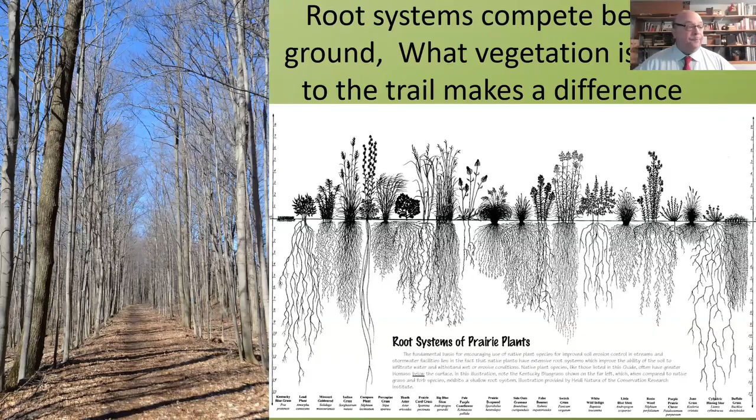Trees, on the other hand, are very large organisms. They intercept wind, and so they build root systems that hold them up in the wind. Let's see if I can't flip down. And so when we look at a tree root system, we usually use this analogy of a good wine glass on a plate. Number one, if we look at enough trees, that means we're drinking enough wine that we can have a little bit of fun. But ultimately, what we have is a relatively shallow horizontal root system.

And that anchors the soil from erosion, but it also is anchoring the tree. So when that canopy intercepts wind, that energy that isn't taken by the tree moving its branches gets distributed down to the soil level. And so we're building a mechanical structure underground to hold the tree up. If your tree is too close to the trail, the pavement is going to lose more often than not, because the tree is going to grow to hold itself up in the wind.

Different tree root structures can be described. Most often, 85 to 90% of the root system is in the top 12 to 18 inches of soil. We get plates that can look heart-shaped, post roots, or shallow plates.

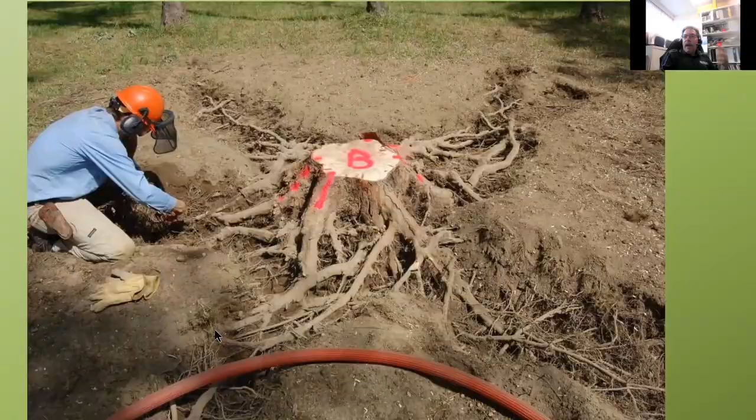If your soils are wetter, compacted, or poorly drained, you're going to get more surface rooting because roots need oxygen and water. They'll be even shallower in a compacted or hydric, wetter soil, so keep in mind that roots grow differently in different soils. That's why the structural soils image showed roots growing deeper—there's more rooting space, air, and the water is draining downward.

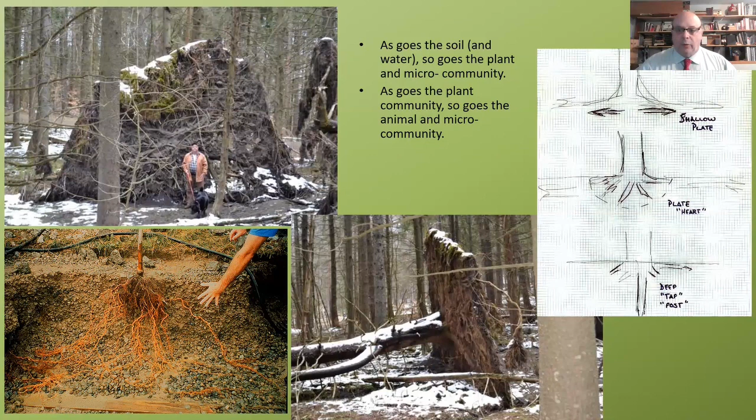Roots will follow water, that's so true. Roots anchor that tree in the soil, but they also fuse with the same species and build root networks through the forest edge. So if you have a trail by the forest edge, it gives us opportunities and efficiencies in where the roots can be and how trees contribute to each other in their management.

When we get close to the trunk of the tree, you have lots of roots going into one trunk, and roots are really good at fusing and grafting to themselves. Here we have 8 or 9 roots that have become one composite root, and you can see the soil trapped inside it.

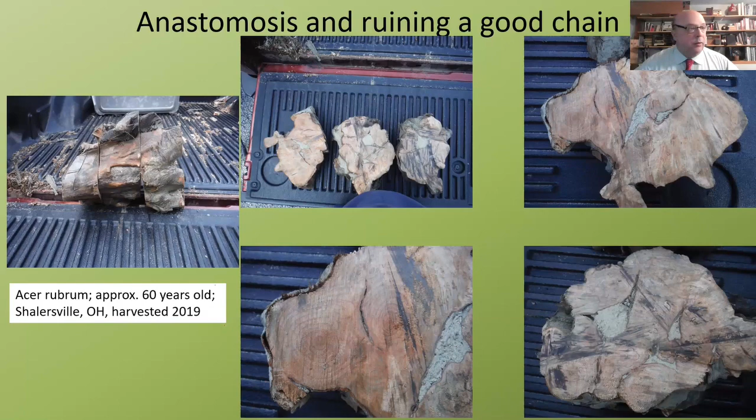When you're close to the trunk, you get more damage to pavement—it's just raw mechanics; this larger root translates load differently. Close to the trunk we're playing a mechanics game with the tree: roots grow more upward than downward near the tree, but by a few feet out they tend to become rope-like. This zone of rapid taper runs from the trunk to a couple of meters away, going from large roots that will blow apart pavement to more rope-like roots we can manage alongside pavement.

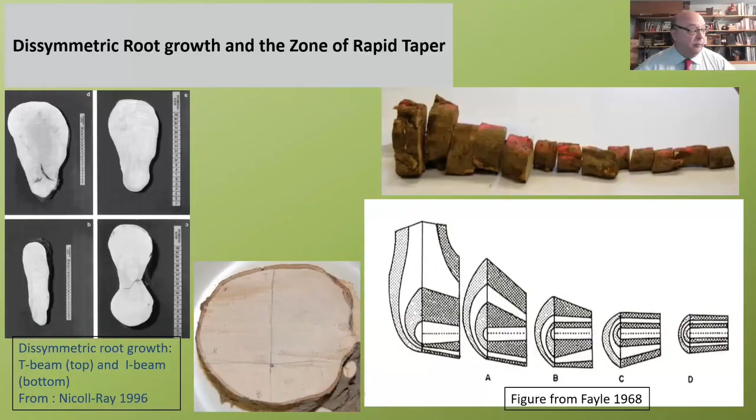So it's really a distance game, and we can bias that trajectory by having the right meadow communities immediately adjacent to the trail. Now, we've been playing this for a while.

When Superstorm Sandy hit, we looked at 126 trees that were blown over by the wind, and this is the data. Almost all of the roots on the edge where we have a wind-thrown tree are about 1 to 1.5 inches in diameter—that's where the energy moving through the root is so high that the roots literally pop, and that's when the tree flips over from wind throw.

We notice maple roots tend to break when they're smaller, while oak roots tend to break when they're a little larger. So there are species and genus differences here, but basically we're looking at about 1 inch roots. Where do we see that break? If we look at this plot, you can see that as trunks get bigger, you have to stay further away from the tree.

What we're measuring is where those roots broke, which matters because this is where the trail gets uplifted when the tree falls over. If we look closely, it tends to follow this line. These stars are data from New Jersey, and this graph is from spruce trees in North Germany. Wide difference in plants, wide geography difference. This is really a structural physics problem, not a biology problem.

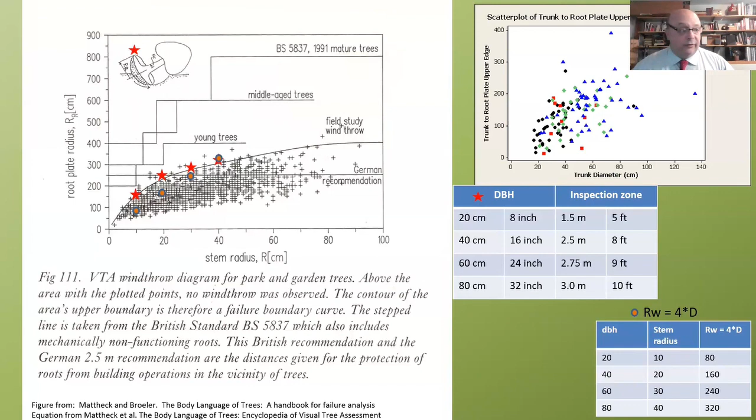Vinny, we good with that? Yeah, I think the only concern is when we talk about root pruning practices—how close do we get to this tree to root prune it. When it's young, it's more adaptable to root pruning. As it gets older, we'd be concerned about destabilizing the tree. Exactly, and that's what we don't want to do.

So I look at this and ask, maybe can we shift the trail? If we're keeping the tree, can we bow the trail around that root? Can we raise the grade of the trail? Are there other things we can do if we're keeping the tree? Because what we don't want is to create destabilized, unsafe trees along your trails, since we'll be talking about cutting roots here shortly.

Yes, we will. And that 10 feet, I want to really hit that hard. The data supports, at least with a Superstorm Sandy scenario, that it's a really stable number. So make that your target—it's the best target we have. If you don't use 10 feet, you've got nothing. So I encourage 10 feet.

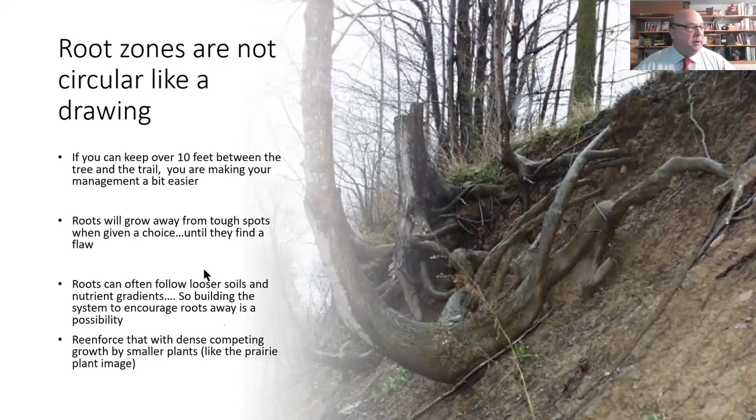The nice thing is we also know root systems don't grow as circles like they're drawn in picture books. Here we have a tree on a hill where all the roots go off to the right, and the functional root system occurs about 6 feet up on the trunk because of how the ground is laid out. So we want to think about the context of where your trail is, as well as the distance—but it tells us we have the ability to train roots away from the trail, and we don't necessarily have to worry about limiting root zones by running the trail. But again, stay 10 feet away so you can build a good plate to hold the tree up against wind. That's an important thing to consider.

If we have a tree close to a trail and we cut the roots, what we know will happen as the night follows the day is, one, you've made an open wound on the tree that you're burying in soil. So all the yeasty beasties in the healthy soil have the ability to attack that root and start root decay, and you don't want that if you can help it. The way we typically talk about this as arborists or tree care professionals: you make clean cuts with clean tools.

Quite often you can make your trench, but then we need to go through after trenching and clean all those cuts. That cut will callus over, and then root primordia will shoot out of that root—much like the Hydra in the Tales of Hercules, where you have one root, now you'll have twelve, and they'll all shoot right where that original root was. So this is not a winning proposal to try to cut your roots as a way out of a damaged scenario. The roots will grow back and completely undo your effort unless you have a provision of space so you can train the roots where you want them to go.

We typically try to avoid cutting any root greater than 1 inch diameter, which happily is about 10 feet away from the tree. Isn't that nice? So again, let's keep it simple—there's your distance. Now a poll question for you.

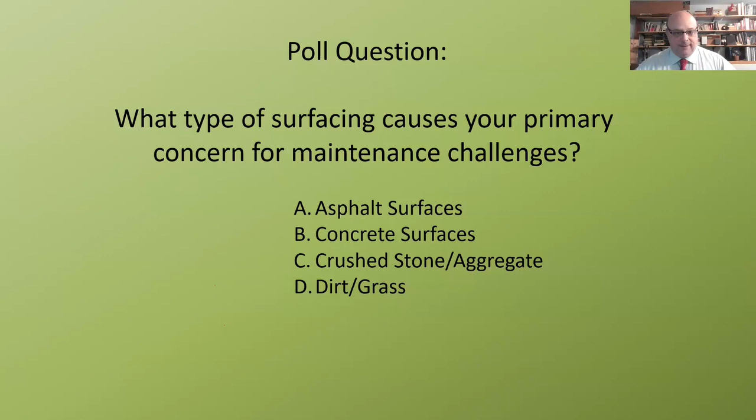All right, answers stop coming in, so we'll stop there. Okay, what do we got? A lot of asphalt. Okay, you bet. Here we go.

We're going right to asphalt. It turns out that a lot of our trails are built like pavements, and I use the word sidewalk here instead of roadway, because a roadway is typically done by DOT with Superpave technology, which is a multi-layer system that's heavily engineered.

When we're doing trails, usually we have that surface, then we have a compacted base over a compacted soil. So this is just kind of a drawing that I use when I'm talking about designing soils for parking lot pavements.

But what we have is the tree. We have roots that are going to interface with that pavement. Here we have the blockage of a curb, but we have our wearing surface. That's what your bikes or your hikers are on. And then that has to be supported by a strong material.

We usually call that a base, if it's a material that we bring in onto the site. If it's just the soil and then we put the asphalt directly on the soil, we just call that a subgrade, and we compact that very heavily.

The reason why is if I put a load on the asphalt, that load has to be transferred through that wearing surface to the soil below. Everything is held by the compacted soil underneath your surface.

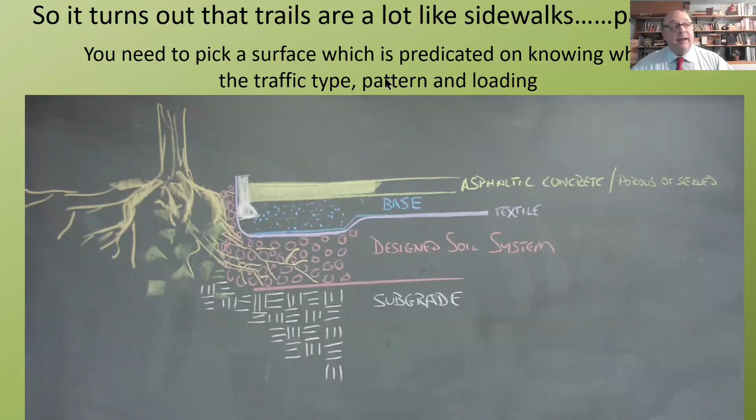So when we're thinking about trails and trees, you need to pick a surface, and you need to know what is the traffic type, the kind of traffic patterning, and the loading, because quite often asphalt can work, but it's very expensive, and maybe you're over-tooling the trail. It really depends on how much traffic and what the loading is going to be on that trail.

To do asphalt surfaces, you do have to compact. And if you do a concrete sidewalk surface, you have to compact. And what we do is we compact it to a magic number. They call it 95 to 98% proctor density. We'll talk about that in a moment.

We put the thin layer of gravel base to level things off, if at all. And then we either pour a concrete with a wire reinforcement, or we can put down that blacktop and roll it out, punch it down. And then we have a surface for our riders and our hikers.

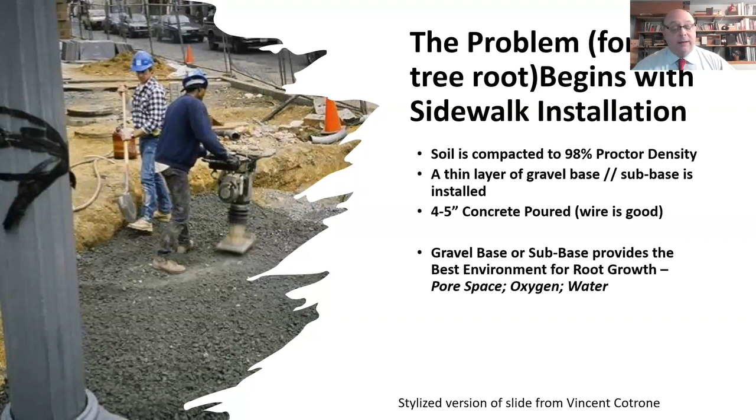Now, the thing is, a lot of times if we use a gravel base, no matter how hard I punch it with a vibratory tamper, there's going to be a lot of airspace. So roots can grow in that. And if roots are close to the pavement, that's what's going to crack your pavement.

But let's start with compaction first. When we have a soil and we compact it, we're putting energy into the soil. What does that do? Well, it does not change how many solids you have in the system. And water being incompressible, it doesn't change the water in your system. The only thing that compaction can do is rearrange the solids so that we eliminate air-filled voids.

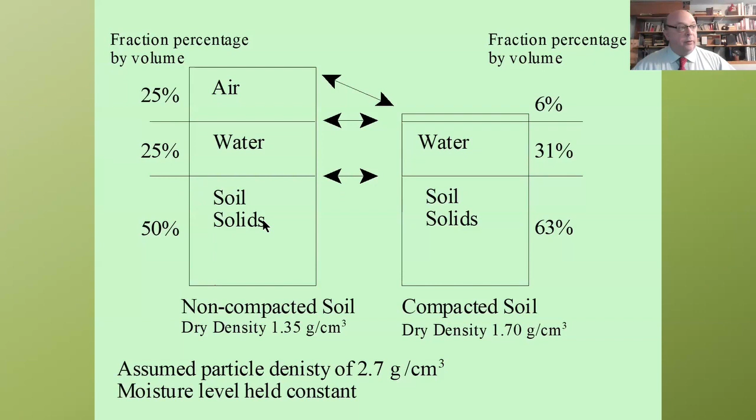That's all we're doing. It's like squeezing a sponge and getting all the air out of it when it's underwater. That's what compaction does. More to the point, if I compact the soil and then it rains, I've eliminated drainage, so I have very little air in the system, which is good because usually that means that the strength, the bearing strength of that soil goes up and becomes very predictable and reliable, so I can design my pavement surface. That's a really good thing if I'm about the pavement.

It's probably not such a good thing if I'm a plant, and that's okay. But the thing is, between that surface of the pavement and that soil, there is a weak zone. It's an interface between two different materials. The root is going to follow that least resistance channel. So you're biasing the roots towards those interfaces between the wearing surface and your base, or between the base and your subsoil.

Hey Jason, I know I said I wasn't going to do this, but there's a question that came in: is there a reason why we can't compact to 80% instead of 95-98%? Yes, there's a couple of important reasons. One is it's very hard to control for 80%.

We usually use 95% because it allows us a 3-point inspection process. We test one section, we test another. If they're close together, we accept the compaction. If they're different, we pick a third one and go with the average of the closest two.

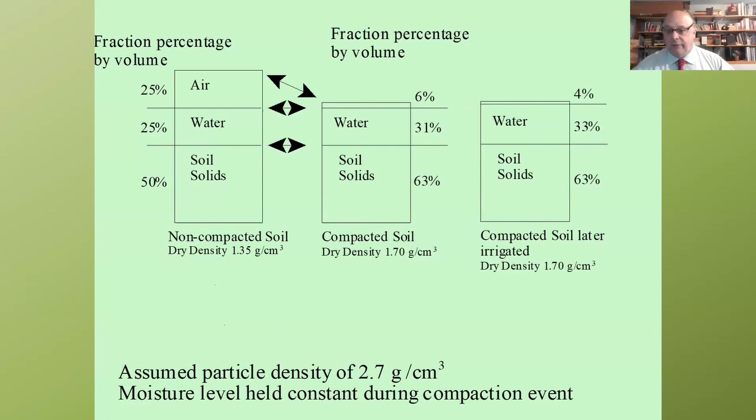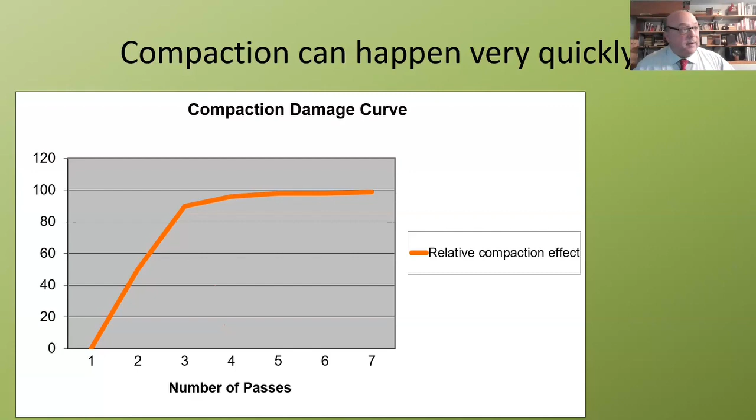So if I play the game right, I can choose different kinds of compaction on the same soil and change moisture content, and I can predict where my peak density will be after passing over the site and putting energy in. Why that matters: if I use heavy equipment, I'm going to have a denser soil. I use light equipment, I'll have less density. I could have overweight chickadees jumping up and down on the soil and create a curve like this.

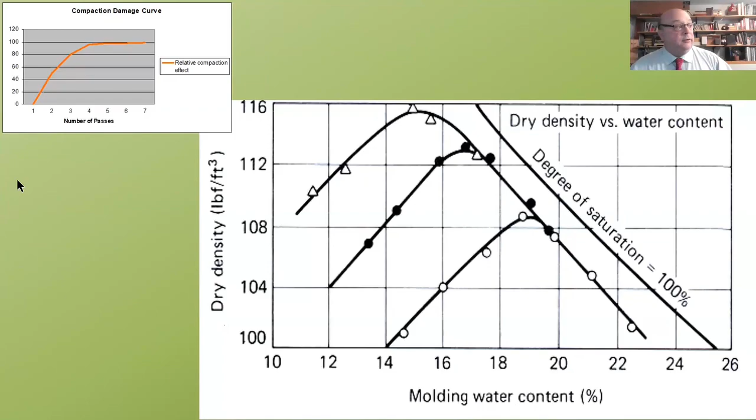It tells us that when we're building the road, we pay attention to moisture, and the number of times I hit that soil really has a diminishing return. So all of our compaction equipment is designed to hit 95% density at the right moisture content within 3 passes. That's why we get to 95%. It's just a convenient way for us to have reliable behavior and have equipment designed to get it to a point where it can support the pavement. So hopefully, Vinny, that answers the question.

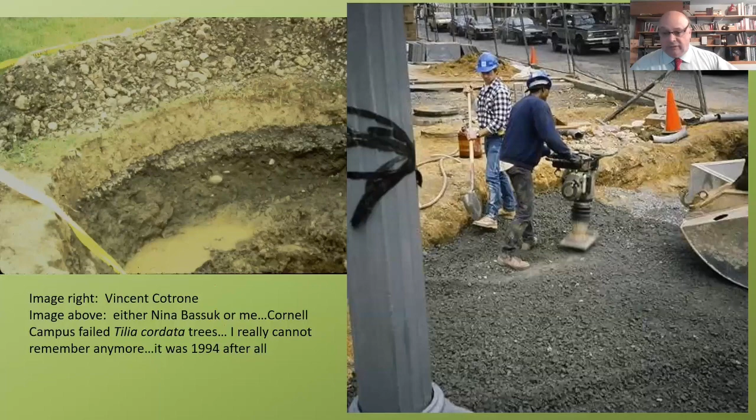When we build something like this, we're going to compact it rather heavily so we can support the surface treatment of your trail. The only way to get out of that is to decompact the soil. We've been doing that for a long time. This is the most violent method, but I think one of the more fun methods of decompacting that soil. This is meant as a joke, folks, but this is how we used to deal with it.

I love it. What we have found, though, is that if I have a really sandy soil or a gravel matrix like a base of crushed stone, if I can control the size of those stones, even if I compact it as much as I can, even past 95% of my target, I can still have root penetration and air voids, but it has to be over 80% sand. We find that if we're less than 80% sand, by the time you properly compact, most roots do not want to penetrate that soil.

So going to some of Tom's comments, if we build things correctly, that helps us. It doesn't avoid the conflict, but it certainly helps us in the management of the conflict. So a lot of it has to do with moisture control when you compact, compaction control, and the design of that trail.

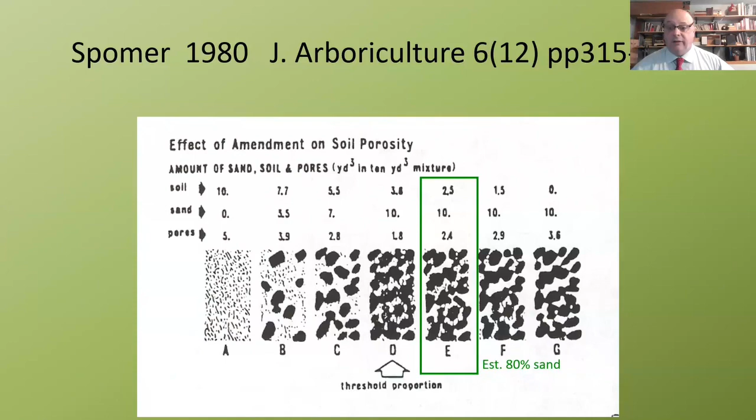Otherwise, even if it looks really nice, we start getting bumps where we have roots underneath displacing upward that pavement. If we displace it upward enough, we get tension across the surface of the pavement, and that develops a crack. Once I have a crack, now I have air getting in there, I have water going in there, I have an interface that's artificially weak. Roots are going to blast through that and expand. So once you get the crack, now you're off to the races and the tree is winning.

And the tree may be on both sides. It grows through the fence, and the railroad will say, it's not mine. The trail may say, well, I don't know, but it's especially the invasives, and maybe you can talk to that.

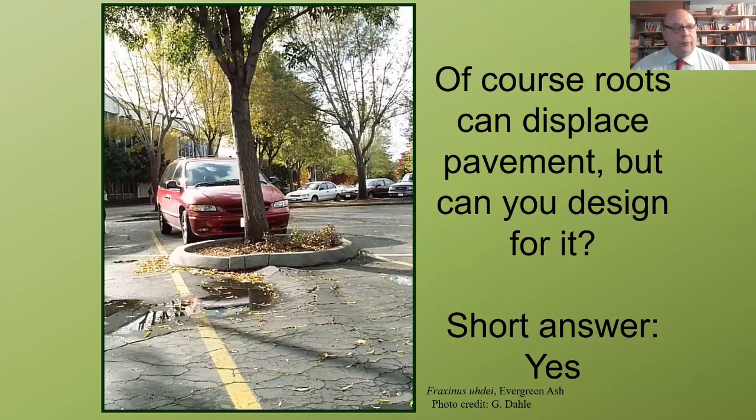So can trees displace pavement? Of course they can. We've seen that. But can we design for it? And the answer is, well, yeah, it's pretty easy.

Well, first thing is stay away from the pavement as much as you can. The closer you get to that trunk, the more likely you have thicker roots with an upward trajectory of growth. And that energy, every time that tree flexes its trunk in the wind, is going to put an upward load on that surface. So this is really a distance argument.

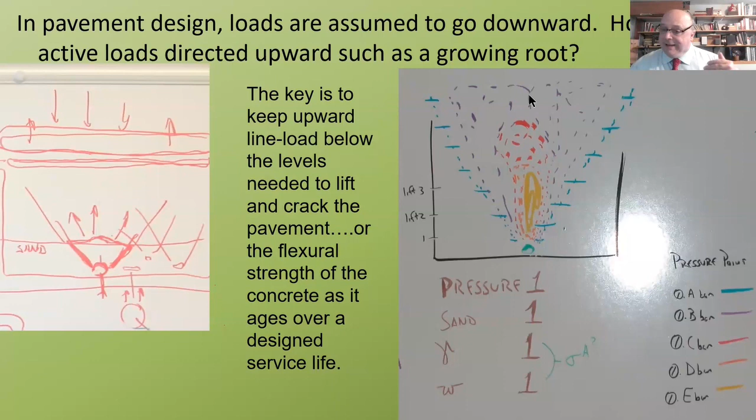And if you can move backward from the side and you encourage a different plant community on the edge, you can minimize some of this. But if you don't have that, we have spent time and years growing roots deeper and deeper away from pavement to see if we can get roots and pavement to coexist. And we've done some of that work. I've actually got several papers where we've worked that out.

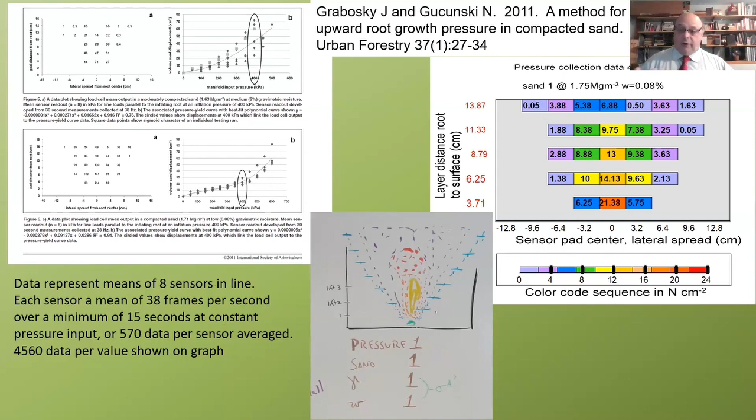The idea is the further away from the pavement, even if you have a high root load, it spreads out with increasing depth away from the pavement. So if you can't get away from the trail as far as the side, if you can drive the roots deeper, you can buy yourself a lot of time. So a lot of our strategies are going to be about pushing roots, going deeper.

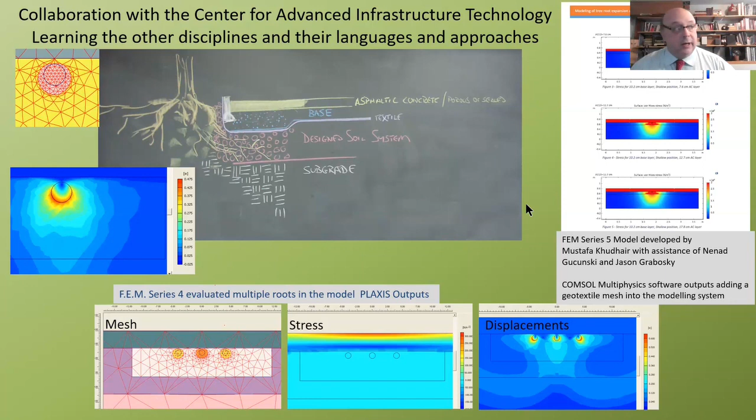And as we look at sidewalks, and this is going to work for trails as well, we're getting more and more sophisticated with finite element modeling, showing how far away the root from the pavement you have to be based on whether you're asphalt or whether you're concrete. And we're getting some of that data put out there.

But how does that help you? Well, number one, we have to think about what are our strategies. First one is accept that you're going to have roots and take a wavier pavement. I mean, what is your usage and what is the demand of your clientele? That's an important question. We shouldn't presume it has to be asphalt until it's proven it has to be asphalt.

If we can't accept it, then we have to talk about avoidance and how we keep roots from getting underneath that pavement. If that's still going to be a problem where we accept that there's going to be roots under the pavement, can we thicken the distance between the surface and where the roots are, or drive the roots a little bit deeper? But again, can we shift from an asphalt to a packed stone? That's really a useful question to have.

We can direct the root growth. We know we can train roots to go where they need to go. Can we contain them so that they don't impact the trail surface? We could do just blockage. So there's a lot of different things we can do.

The first thing I would do is call a professional arborist, unless that's what you already have in hand. Walk the trail, because different trees react differently, and look and say, well, how close is this one to being problematic? Small trees are very different than large trees, so identifying what's coming up will certainly change your management over the long haul. Whenever you can get an arborist walking the trail with you, I think that's a really solid thing to do.

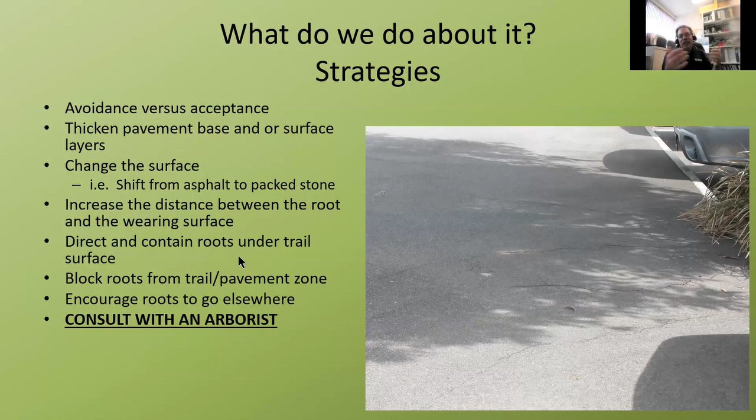One of the first things we can do is keep roots from getting underneath that wearing surface in the first place. The idea is you have to cut a trench and then put a physical barrier between the root and the pavement. This can be done in design, or as a retrofit. If it's a retrofit, realize you may be leaving root system underneath that pavement, and when that degrades and decomposes, now you've got a hole where it's not supporting the pavement. So then you do have a longer term problem once the damage has happened.

To reiterate, if it is a retrofit, you get a trencher, you drive that trench down, cut a slice, and then drop a barrier into place. Those trees were planted the season before, those were new sidewalks, and here was the prevention, and I think you'll see a picture of them later.

There's different root barriers, and they're really affordable. It's going to add expense to your trail, but they're going to extend the life of your trail. There's linear barriers that lock together, some that come in rolls. You can use a geotextile one with impregnated herbicide in it, a little bit harder to set in place because the top of your root barrier needs to be at the top of your paving. Otherwise, roots tend to jump over things if you put it too deep.

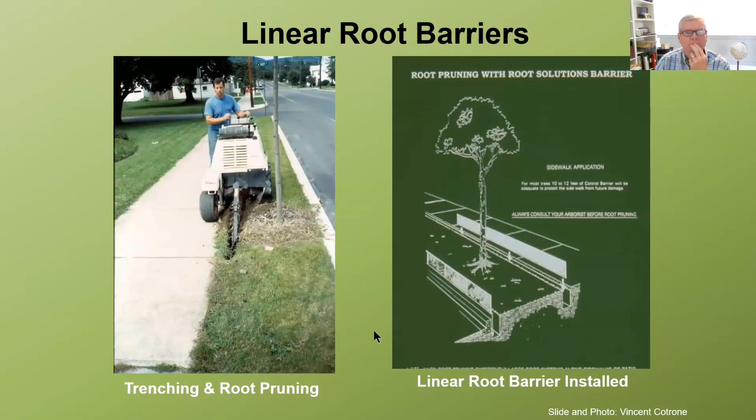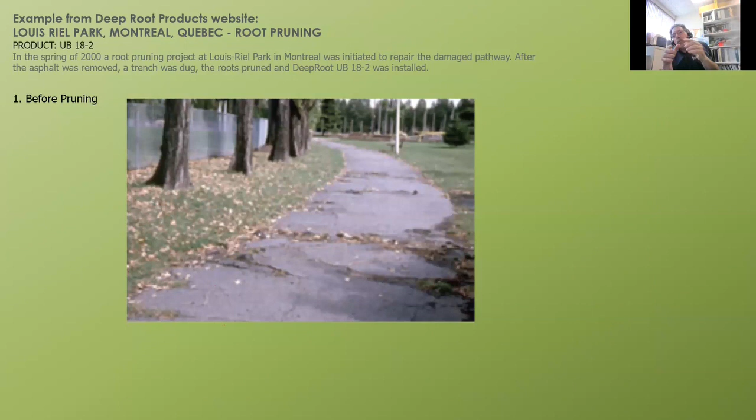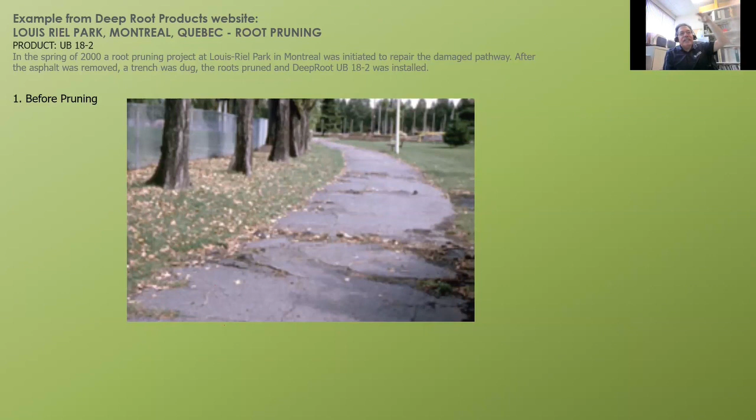So I know Jason's got, I don't want to chew up time. Jason's got some images here of it actually being installed as a retrofit in a park setting.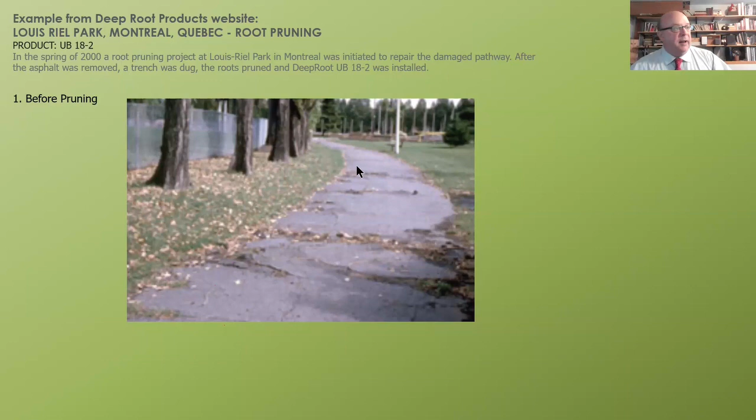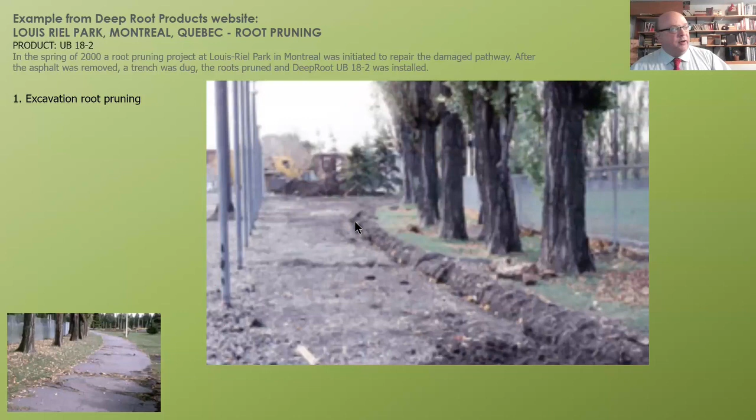So here we've got damage to an asphalt trail. This is from Deep Root Products website, and I've got to say, the roots are a little bit close to the trail to begin with, but I understand this is design. So what they did is they went through and actually excavated out, pulled out the trail, cut a deeper trench, and put an 18-inch deep linear wall. This is a structural plastic wall, in segments, so they just kind of lock them in. It's click and lock technology, just like if you had a floor that you were putting in, like a Pergo floor or something.

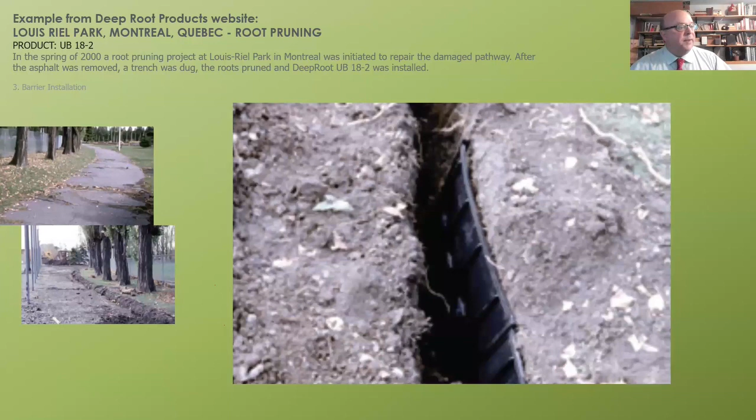Once they have that in, it's snugged up against the soil on one side. You can see it in the trench here. Then they backfill and put the new asphaltic surface on. When they did that, they pulled out all of those decomposing roots they had cut, so they didn't have cratering later on. So this would be rebuilding the trail, but now rebuilding it with a wall.

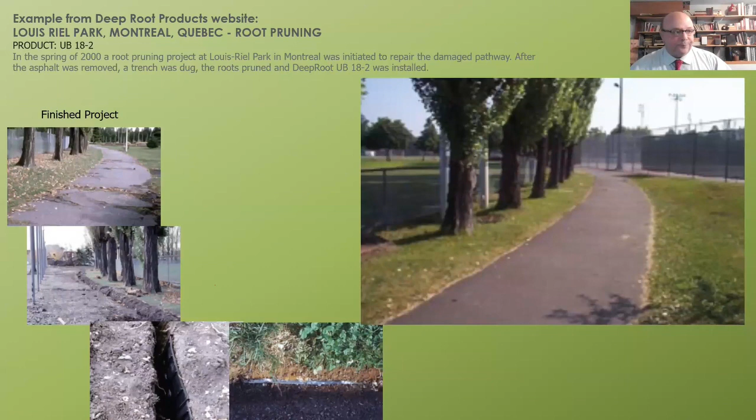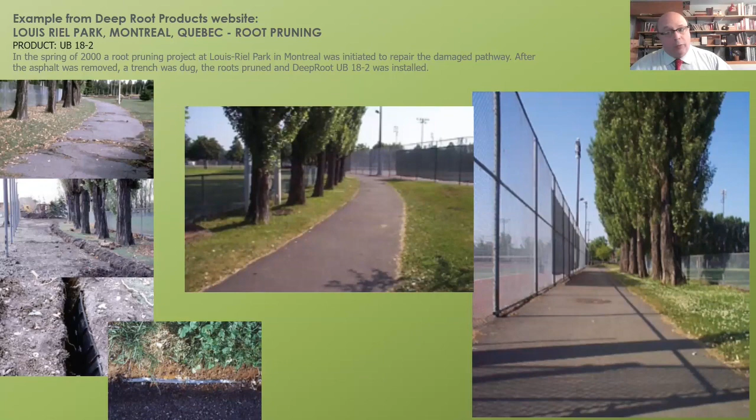And it can last for a good period of time, even in close proximity to the tree. That does nothing to address whether these trees, intercepting wind, are stable. Again, I like that 10-foot rule. I know we don't always get 10 feet, but you can see how this thing may work.

Now the idea here is you have to dig the trench and then put it up against your wearing surface. As a retrofit, this has to be sealed up against that concrete. I'd suggest using an adhesive so roots can't simply jump over and back down underneath, in between the sidewalk and that wall.

Yeah, Jason, we've even used them as a form. So we've set the root barriers and then poured the concrete nowadays. It takes a bit to convince the concrete contractor that they will work, but they work really well. And once the concrete's poured to it, it's there. It's key, because if you do it right, now you've got some longevity.

So root barriers are not foolproof. Mistakes happen. Roots can get under them quickly and then get back into that gravel subbase, but they really do extend the life of that paved surface, and they really do redirect roots. That's what you're doing, just redirecting and blocking roots from growing in that subbase material we put down, whether it's asphalt or concrete. We tend to put a subbase down and create the perfect environment for roots to grow. That's part of our problem, right?

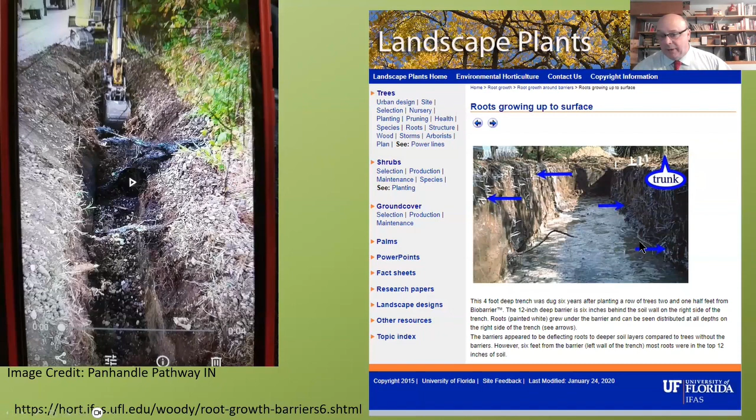This is sand in Florida, but if you have a heavy soil, the roots can go underneath the barrier and run right up the other side and still displace your pavement. So you really want to get the depth, and you really need to compact this zone so the roots don't get underneath that barrier, at the same time if at all possible in new construction.

You can't do it so well in a retrofit.

Now here's a different way of looking at it. And here's a design that a guy named Jim Urban put out years and years ago. It even got published in this infrastructure manual that you see in the center. This is like an egg carton woven geocomposite. It's just open plastic webbing in a three-dimensional panel, wrapped in a geotextile or weed fabric.

We use this for French drains. The thing is, if you build a trench and run the French drain, the roots will run that channel. The data from Cornell, Susan Day did a study on this: in compacted glacial till, the roots didn't move one millimeter out of that trench. In sand, they could move several millimeters out of that trench. But the thing is, they will run that weaker interface and run along that channel. So you can train the roots, not by stopping them with a wall, but by allowing them to get into that fabric, and then they run that fabric line instead of pushing underneath the pavement.

So this is something that there's not a lot of data on, but we do see that it has a positive impact. You would cut your trench and clean the cuts of all these roots so that they're decent, clean cuts to eliminate decay getting into your trees. Then you would put in one of these French drain materials - Enkadrain comes to mind - and it improves drainage coming off of your trail. If any water gets underneath that wearing surface, it can move out into that French drain. So it actually improves your trail design as much as it encourages the roots not to go under the trail, but run alongside it.

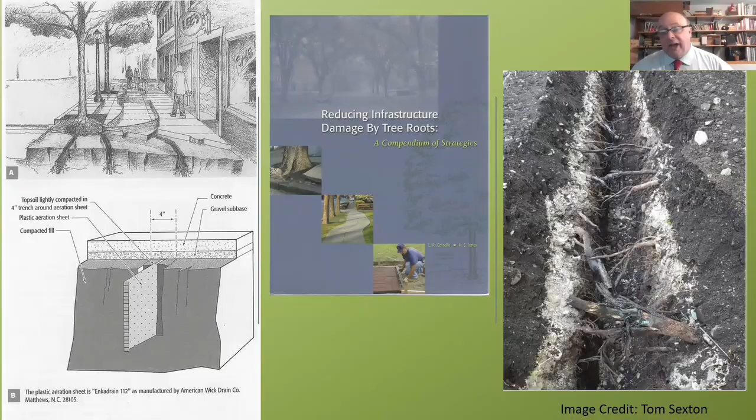So our next poll question. That hole that you saw some white paint - what do you think that paint was for? Was it so that the trenching crew knew how to drive a trencher next to the concrete? Was it chalk dust so that it could show you roots? Was it flour, because flour in humid weather sticks to the roots better than chalk does? Or is it, as we all obviously know, the line from Cocaine Bear as he was walking away from the scene of the problem?

Do we have any? People are getting your joke, Jason. Oh good, good - sometimes when you've got to explain it, it's a bad thing. It's skewing the numbers. Have you used that on a quiz with your students, is what I want to know? Not yet, I'm road testing it with this audience. Okay, we're sophisticated. Yeah, my students should be studying for finals - they shouldn't be watching Cocaine Bear. They can do that over the summer.

How'd we all do? We've pretty much tapered off, so we're split across the board, we're not really sure. Yeah, well I'm not sure either. It wasn't my picture, but I'm assuming it was to show the roots.

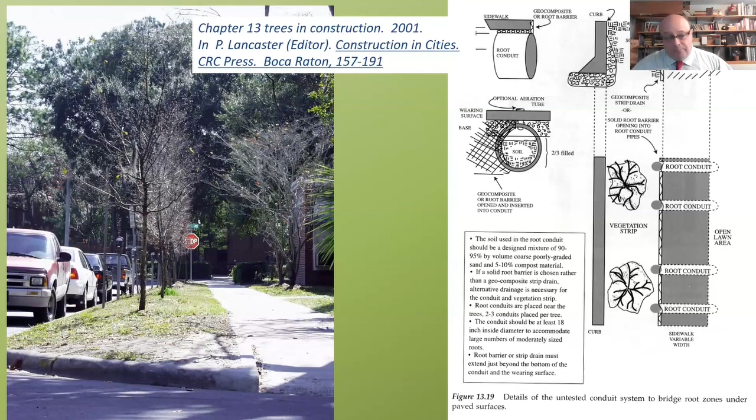So this is something that can be tried - again, there's only a little bit of data on it. It's very expensive to try to test a system like this, but it should be able to work. Again, you could either use a solid barrier like this, or you could use that strip drain. I think the strip drain works because it encourages roots to go in - it has very little support, so it's hard to push in underneath the trail because you don't have support. So they run along that strip drain, but then you put the strip drains into your conduits and you're off to the races. Whenever possible, please use that 10-foot buffer - if it's a small tree or shrub, maybe 6 foot.

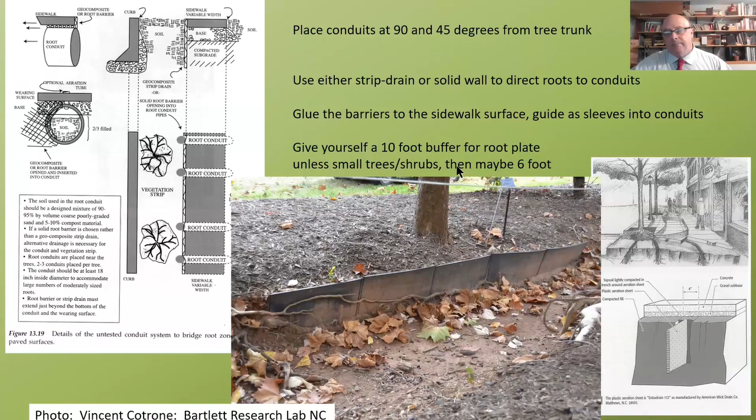If you really want to go Cadillac, you can actually put cages down in that soil zone, and you can build a cantilevered bridge over the root system without impacting the trail itself. This is an expensive option, but I'd be remiss if I didn't point that out. The idea is you dig a big trench - well, actually, this is the depth of your sidewalk base now. You're going to fill this with uncompacted soil so the roots grow under the pavement, but there's a dead air space of up to 6 inches, and your trail is now on a decking material.

Yeah, but it is out there. I'll add, if you're looking for these, you're looking for a soil cell, and they really work well in highly compacted downtown areas where we're trying to grow trees.

Yes, they are expensive. The expense is in the excavating more than anything, and you're backfilling with good soils. What we're seeing communities get is stormwater credits for using these. So we can direct stormwater into them, or we can put porous paving on top of them, and they work really, really well and do get deeper rooting.

And so I think that this is a very useful tool. But if you want this for stormwater, usually you fill it with a stone, a large stone, single size. You don't fill it with soil, so you get more credits. But you can get credits with this. It's a very, very useful tool in your arsenal.

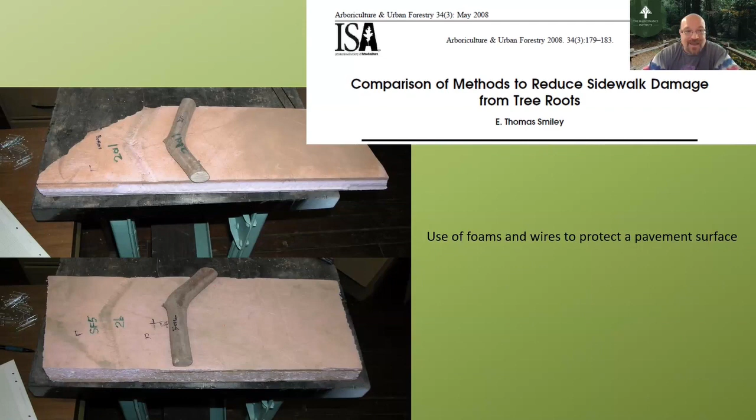It's worth looking into, and Deep Root sells both the linear root barriers and these kinds of cages. So once you get your supplier chain set up, you can get both kinds of products, two different tools, one supplier. Now, just thinking real quick on an urban setting, and especially with rising temperatures and things, is that kind of a future best practice to recommend? Because now we're reducing the amount of watering we have to go out and do, and aftercare maintenance and things.

That is a totally different seminar, about integrating the two and looking at those water budgets. There are three different ways of going about it, and that is one of the ways. But I don't think that I would recommend that as your solution, because it's just a tool. A good tool at that, but there are other ways of going about it as well.

They really have merit when you're rebuilding sidewalks, right? If you're doing a whole streetscape project, you're spending so much money on infrastructure that to incorporate this to get big trees growing, which we know we want in communities for the future, you will get a bigger tree growing in either this or the engineered structural soils than you would in what we typically do, which is cut a 4x4 opening and plop a tree in, right?

Yes, but again, that's a totally different webinar, and we're running a bit long. But we can use structural foams and build distance between the asphalt surface or the concrete surface and the root by putting structural foam in, and we've seen some success with that.

Some people will also put a wire mesh in between, so that seems to give us a little bit more longevity. There's not a lot of data out on these, only one or two studies, but we do see that they can work. We have some anecdotal evidence of it.

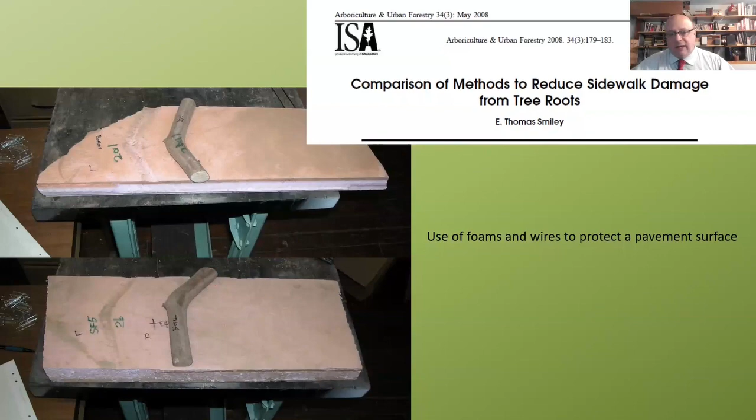We can do what's called slab jacking, where we mill holes into the pavement and then pump a grout, and we can re-level pavements, or we can build a ramp up to the root and beyond the root without having that disjunct. That's more for a concrete surface.

And then where we have sets that are displaced, we can grind them out. This doesn't work so well with our asphalt, but if you have a concrete section, this is a useful thing to think about. Instead of pulling the whole system and relaying it, you may be able to slab jack your way out of it, or grind your way out and buy you some time and budget.

You can ramp over the trees by putting a series of piers and just building that bump. Now, if you're doing this for bikes, you've got distances you have to think about. If you have ADA access issues, and if you have to raise it a long ways, you may have other design considerations that you have to look at.

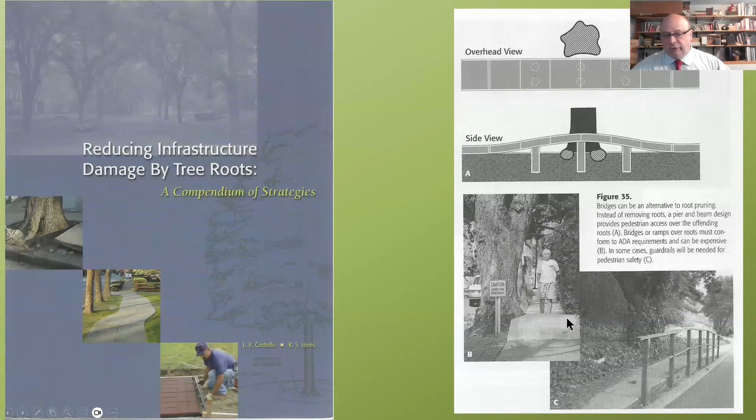What is that surface? Is it porous or non-porous? That doesn't necessarily impact trafficability as far as your user. When are they using the trail? If it's buried under snow and you're not plowing it, do you really need something non-porous? If you are using it during winter, are you putting salt down? That's going to negatively impact the plant community. We have to think about when and where we're using this, and what kinds of traffic we have, not just for the user, but for the management, because sometimes we have to use portions of trails for emergency access. That's going to have a totally different demand than if it's just something with occasional use.

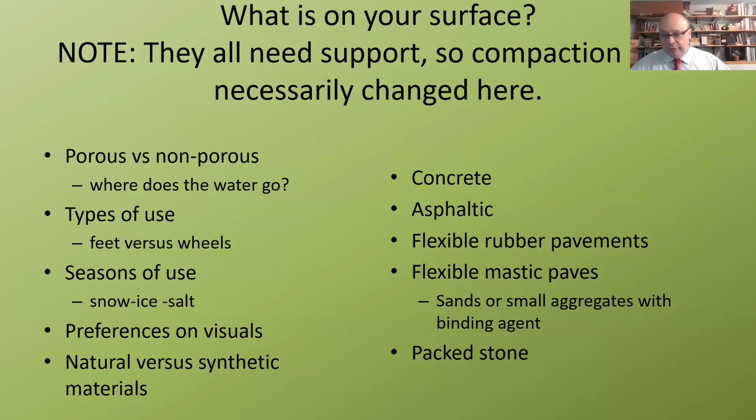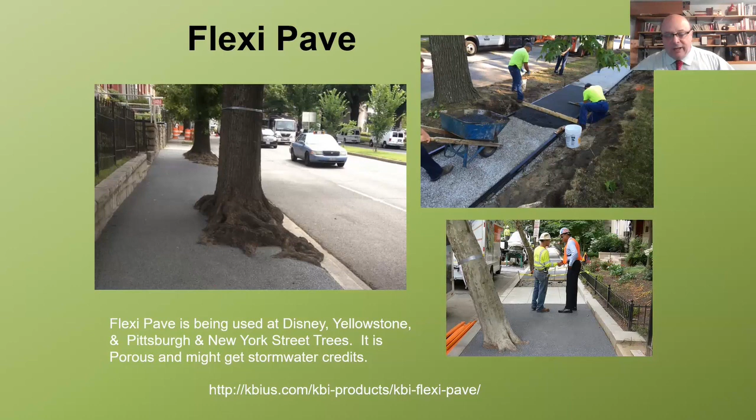We can use a mastic like flexi-pave, which can be asphaltic, rubberized, vulcanized, or any number of materials where we take an aggregate and glue it to a flowable material. Here's one made out of decomposed rice hulls on granite stone dust, giving a semi-stable, totally open-graded surface that's relatively cheap. Even if roots lift it a little, it's not a hard repair. So this is a different natural-ish surface.

We can use compressed recycled tires to get rubber unit pavers that can be reset. But again, what are the roots being cut, and what did you do to the stability and health of the tree? We don't want people cutting big roots just to put this in. Yes, that's great for this particular system as a retrofit for pavement, but it's not doing the tree any favors. Here you have them bumping out to keep away from the big roots and the cuts, but you're still so close to that tree, well within that magic 10 feet.

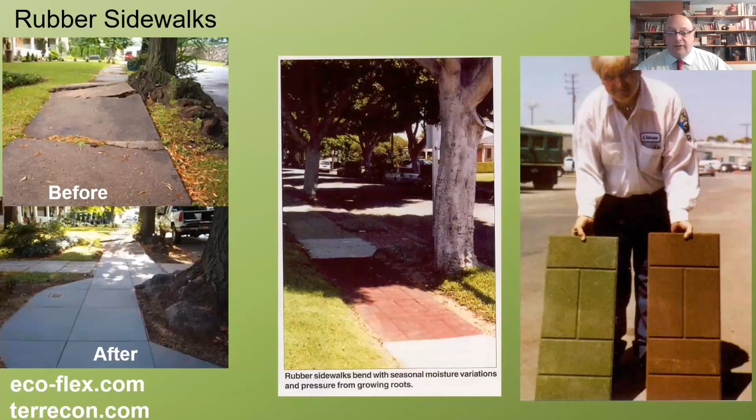Please just try to find some distance wherever you can, it makes your life a lot simpler. Here we have some sidewalks in Canada, literally cantilevered over the root system. We've lifted this by about 2 inches, so we don't have ADA issues. You could do a little ramping and lifting to get beyond the problem with an existing tree. Here you can see the root right at the surface, which means that soil is really compacted. So we just lift over and bridge over the top.

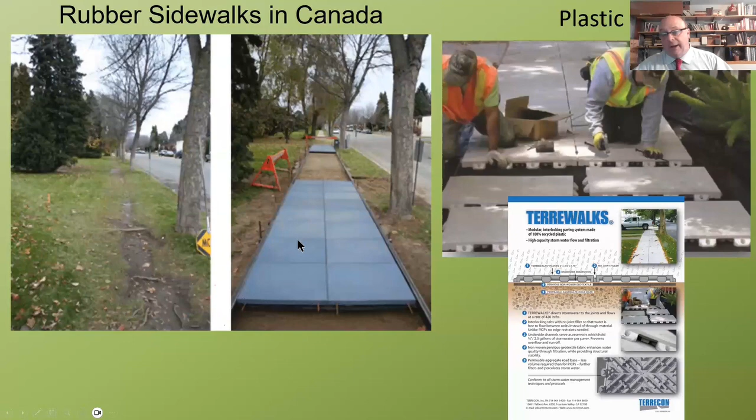But where is the funding? I'll turn this over to Tom really quick. We do have a website where you can find some of that. If you click on that website link, you can find a lot of great sources for funding your trails, but also for funding maintenance. There's a federal funding tool, please fill that out, and it will ask you the dynamics of your trail, then spit out at the end what federal programs you're eligible for. Please do that if you have time.